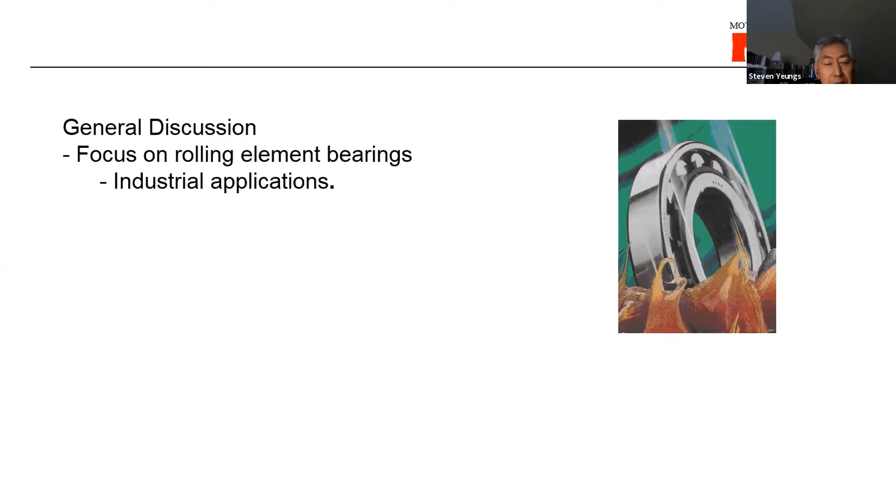So today I will be talking about, it's a general discussion on bearings, the bearing types, the ones with rolling elements, whether it's a ball or rollers, for industrial applications, that's where I belong. The discussion will focus on a few things.

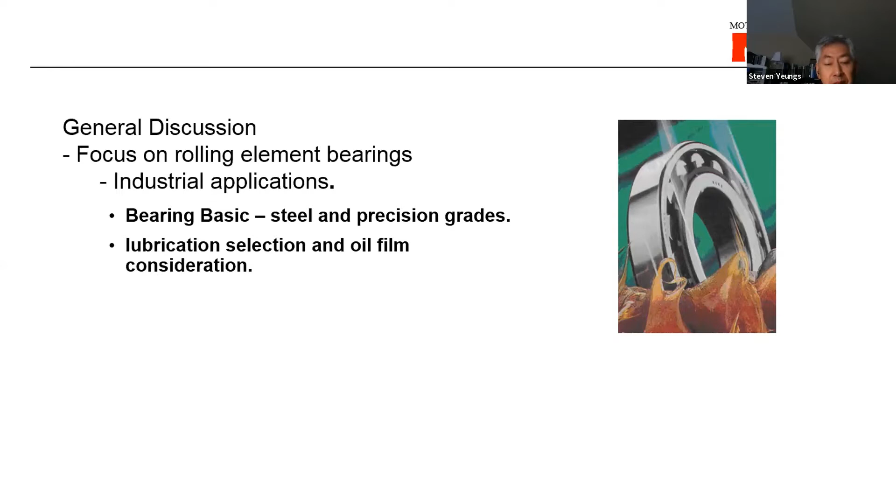One is I want to talk about some of the bearing basics, particularly steel material and precision grades, because for some special applications we have to basically switch steel material or even precision grades to cope with the demand. A bigger focus of today's discussion is on lubrication selection from the bearings perspective, and one of the key primary concerns is the oil film, I'll be talking about that. At the end, I'd like to go through a few cases where oil film consideration might not be enough, and it really poses some challenges, and you have to think outside of the oil film and into other factors.

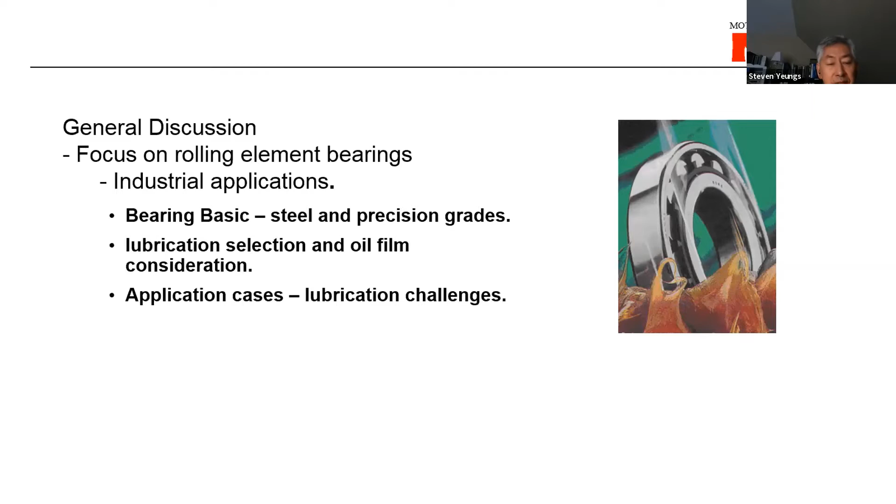So let's start from the beginning.

Rolling element bearings are manufactured in different types and sizes, as small as a pencil tip a few millimeters in diameter, or as big as those used in a steel mill, ship loader, or mining application. They can be as big as 15 feet in diameter, for example, a slewing ring.

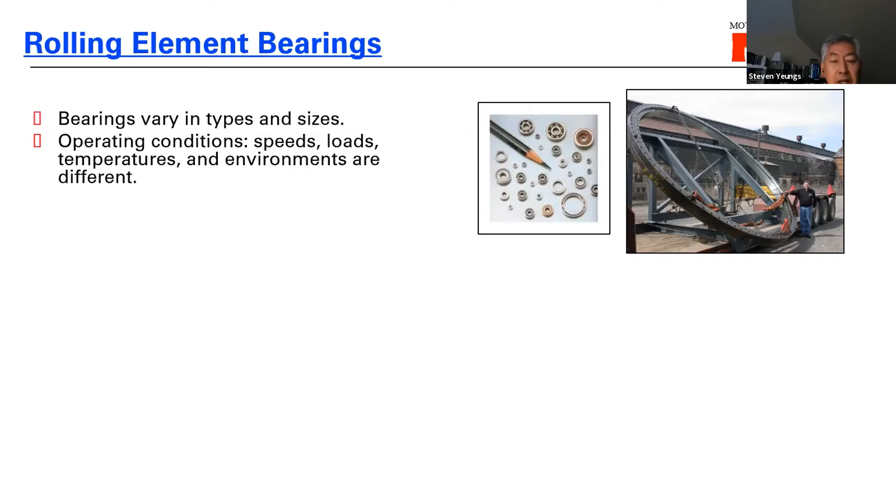Their operating conditions, as you can imagine, the speeds, the loads, temperatures, environments, are all different. For example, an axle box bearing used in a high-speed train running over 300 kilometers per hour, where reliability is extremely important, has drastically different conditions than a dental drill that you visit your dentist for once in a while.

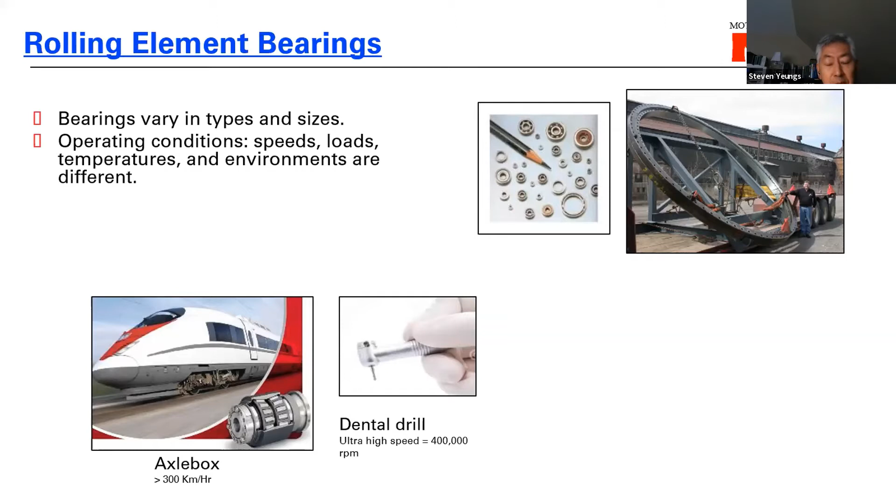Today's dental drill bearings, there are two of them in there. They are very special, running as high as 400,000 RPM, made in a way that produces little to no vibration. They are self-lubricated, so once the bearing has been installed, you don't touch it for a definite length of time.

Now consider a bearing used in steel mills. As you can see, the environment has heavy load, shock load, slower running speed, but also moisture and contaminants that can pass through the seals into the bearing.

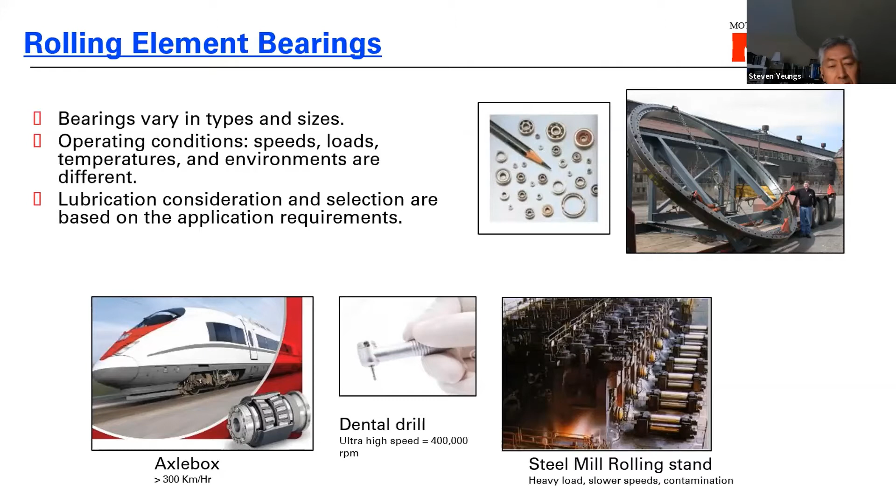So these conditions suggest that lubrication selection should really be based on the application itself. Often people ask, what's the best grease for the bearing? That's not really a valid question, because lubrication should be selected based on what the bearing is being used for in that particular application.

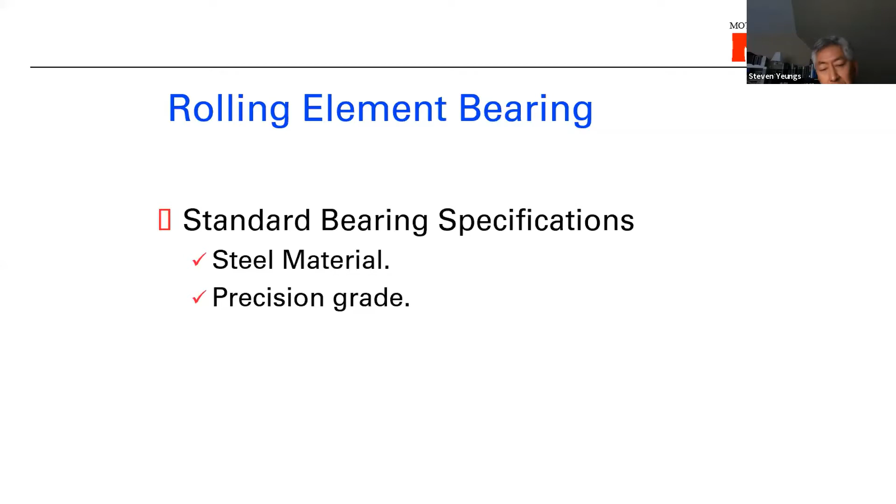A little bit of information on bearing basics. Bearings are made to certain standard specifications. I'm going to talk about steel material and precision grade before we talk about lubrication again. In terms of bearing steel, what are the characteristics?

Bearing steel has to be made very pure and low in impurities or dirt components to ensure it has good fatigue strength. The bearing steel should have very high hardness - today's hardness values are about 58 to 62 Rockwell C as the standard range for most bearings. It should also have high wear resistance and high dimensional stability.

Normal bearings could operate up to 120 degrees Celsius, but some bearings are made to withstand up to 200 degrees Celsius, and they require high mechanical strength.

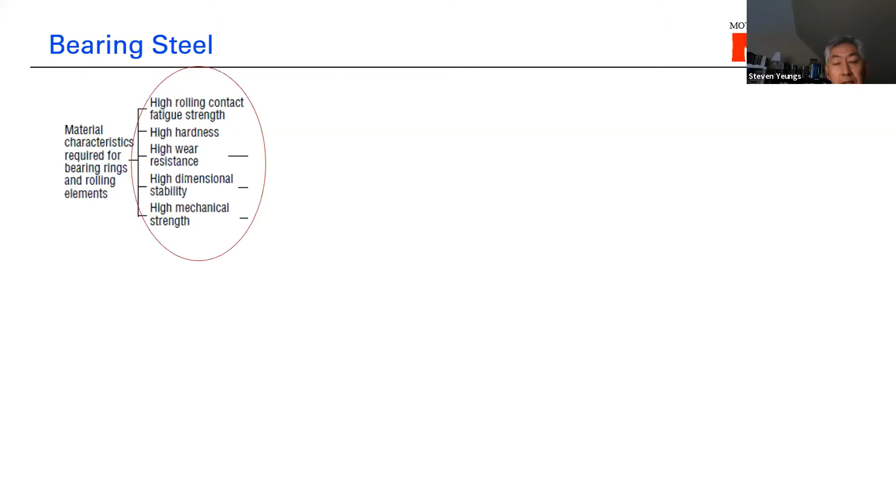There are common steels out there, and the most common is through-hardened steel, which people might hear about from time to time. Through-hardened steel means that through the cross section, the hardness remains the same throughout. The recipe is known as 52100, which is the ASTM spec.

NSK uses the Japan Industrial Standard, so the equivalent is SUJ2 or SUJ3. The characteristic is that this bearing steel is basically a high carbon chromium steel - you can see about 1% carbon, with chrome and additional alloys.

The other type is case carburized steel, which is the opposite of through-hardened steel. The carbon content is low, about 0.2%, with chromium and different alloys added as well. There are many others out there.

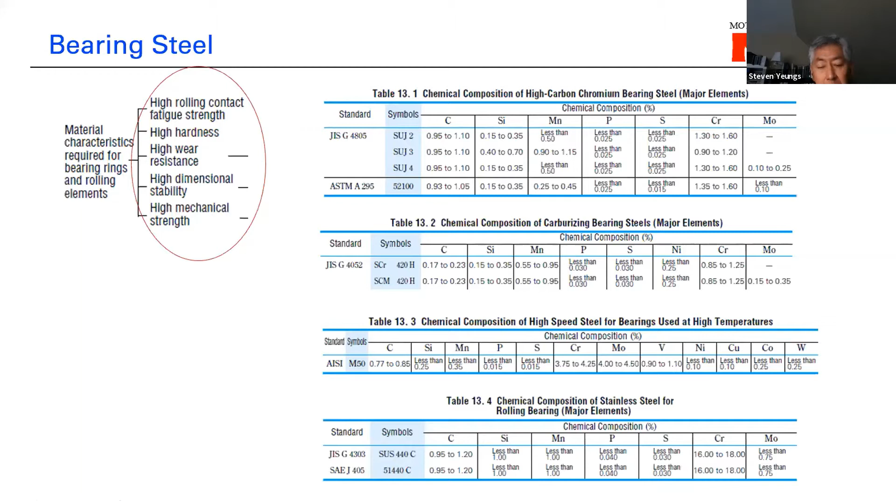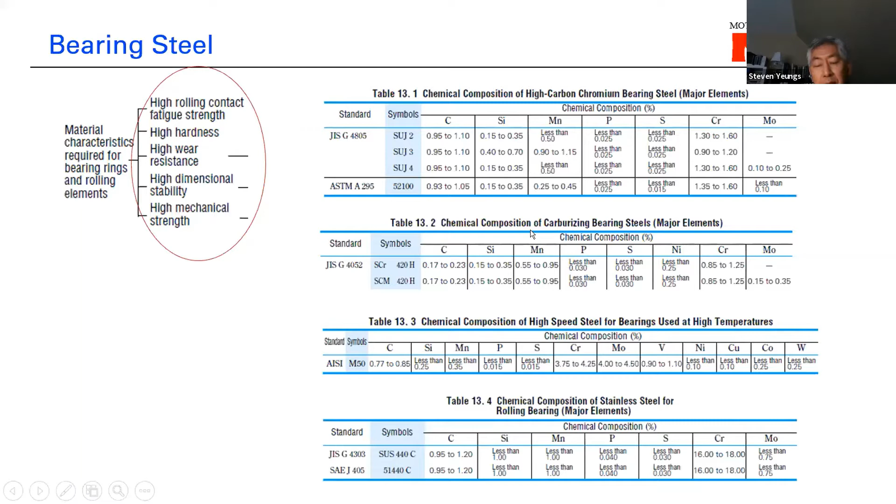For aircraft applications, we use M50 - as you can see, the recipe changes again, they're different. Stainless steel is often used in the food industry, medical industry, and for small size bearings. Stainless steel has about 1% carbon and very high chromium content. All these are produced, and there are many others for bearings used in different applications.

But one thing for sure, bearings still have to be clean - they are very pure. Over the last 40 years, manufacturing of bearing steel has been refined so much that the oxygen content has been kept so low.

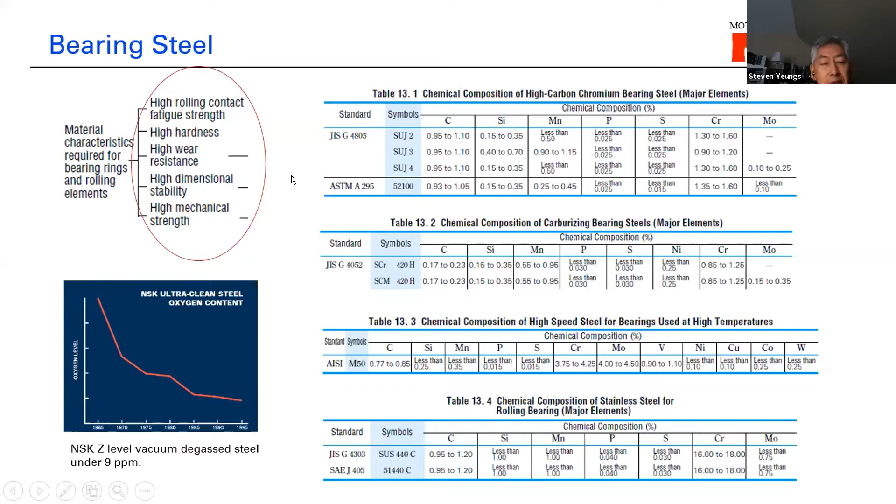Nowadays, as of the year 2000, NSK, as far as steel goes, maintains what they call the Z level - they can keep the oxygen content way under the 9 ppm mark. In any case, for some of the key major manufacturers of bearings, trying to keep the steel as clean as possible is one of the major goals, in order for the bearing to have good fatigue strength.

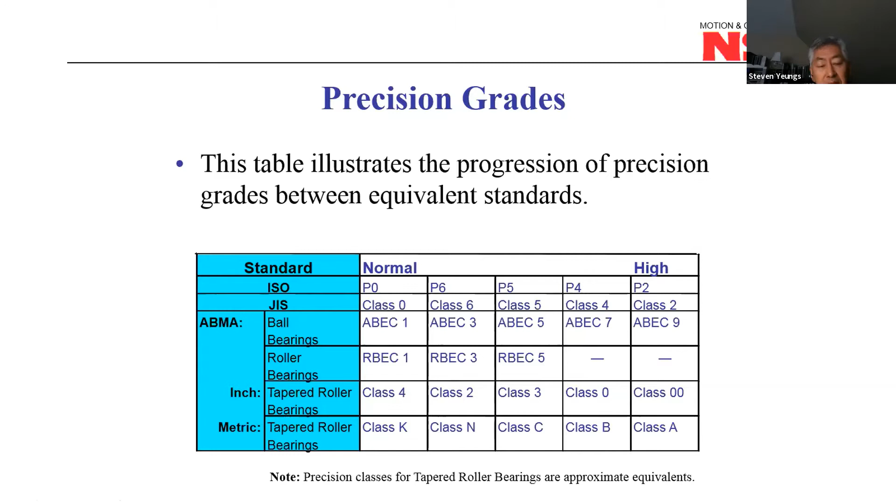Most bearings are made under normal precision, P0 or ABEC-1. That's for the standard bearings you deal with on a daily basis. When conditions get more demanding, toward much higher speed or higher accuracy, we have to go for something toward the right hand side, whether it's ABEC-7 or P4 spec, the equivalent.

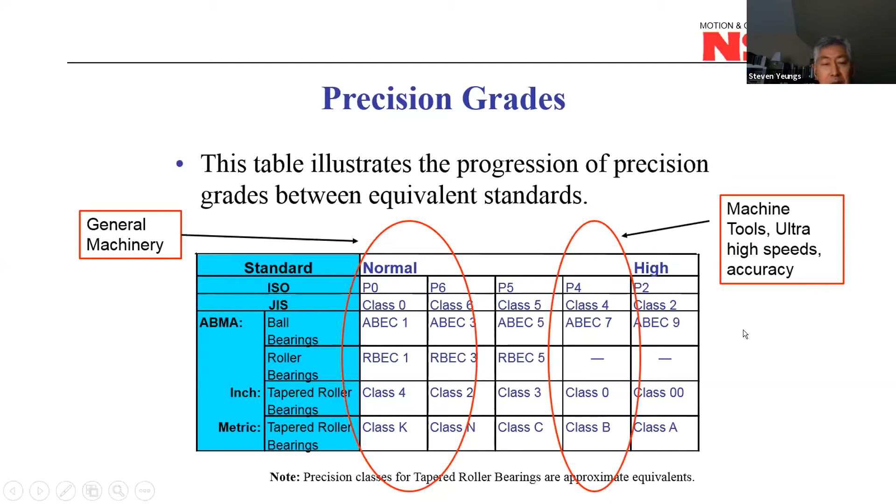We have to go for something with even tighter tolerance or better runout in order to achieve the objectives. So, just a little summary: not all bearings are made equal. Bearings have to be made differently in order to cope with the conditions I mentioned earlier. Even back to the first slide, the bearing I use in a dental drill is not an everyday bearing.

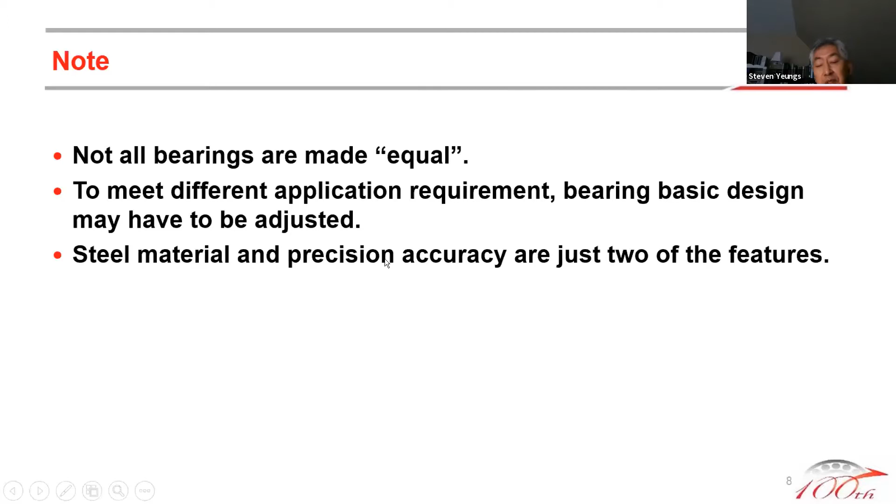They are totally different from what you deal with every day. The whole bearing has been gutted, from the material to the cage to the ball material and the lubricant itself. So to meet different application requirements, sometimes the bearing design has to be adjusted. As I said, steel material and precision accuracy are just two of the features I mentioned, and there are others which I'm not going to get into today because of time constraints.

What about lubrication for all these different types of bearings? How do we look at them and how do we select them?

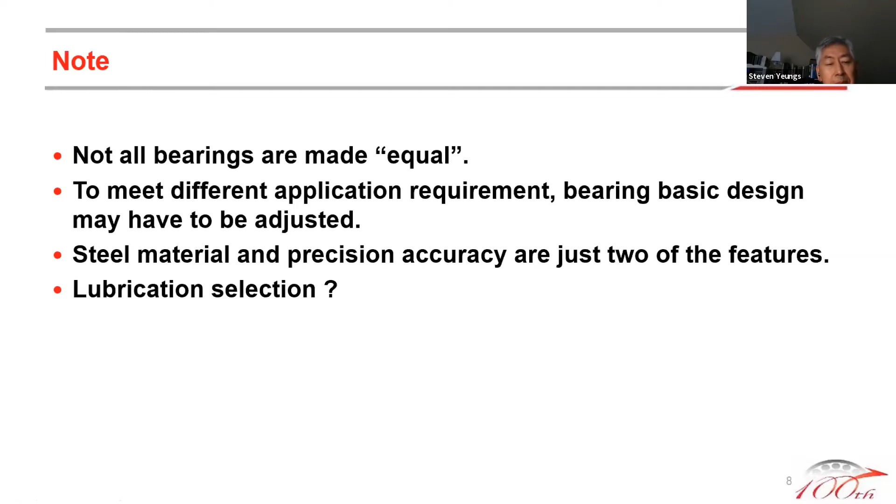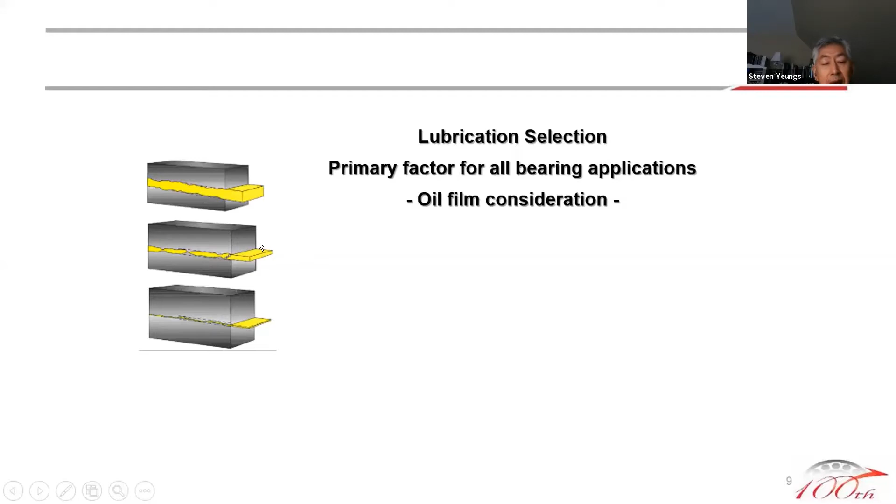For all bearing applications, when we look at lubrication selection, our primary concern is the oil film. As you can see, if the oil film is not there, you're going to have metal wear. So we want to establish an oil film so that metal wear can be eliminated or prevented. That's really the objective of lubrication: to form a film between the bearing components that move relative to one another so that metal contact can be eliminated.

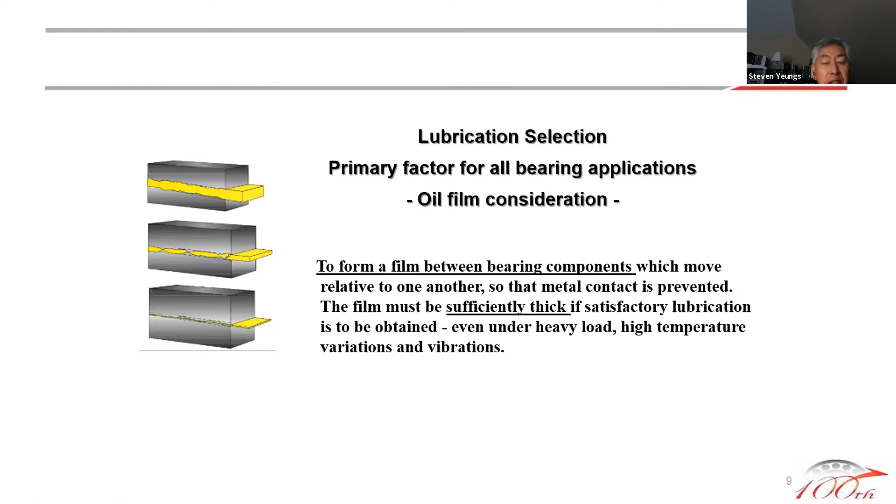The film has to be thick enough, but you don't want it too thick, which I'll explain later on. It has to maintain its thickness under different conditions: heavy load, shock load, high temperature. So it has to be selected in such a way that we can form a film adequately.

When we look at the contact area closer in a bearing, theoretically we use the term oil film parameter, which is a function of the oil film thickness versus the average roughness of the surfaces. We want the oil film parameter to be greater than 1 in order to have that separation. Typically, how thick is that oil film? We normally use the figure of 1 micron under operating conditions. As you can imagine, the surface roughness is about 0.1 to 0.2 micron.

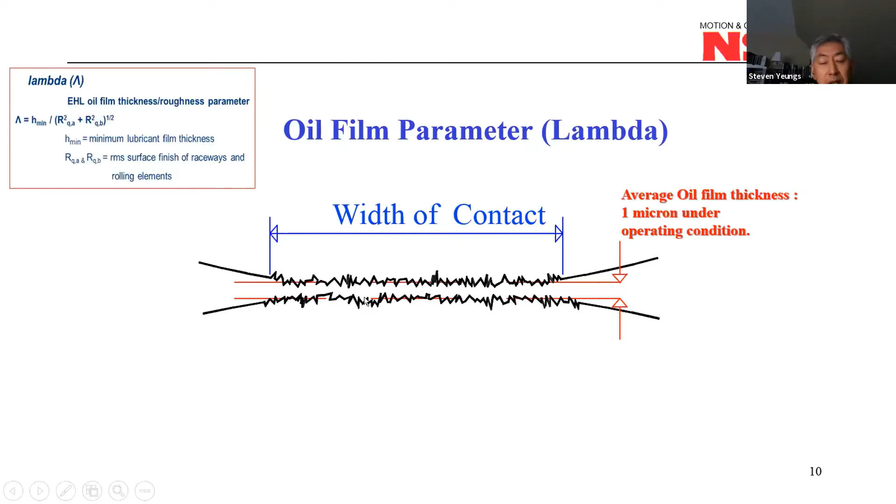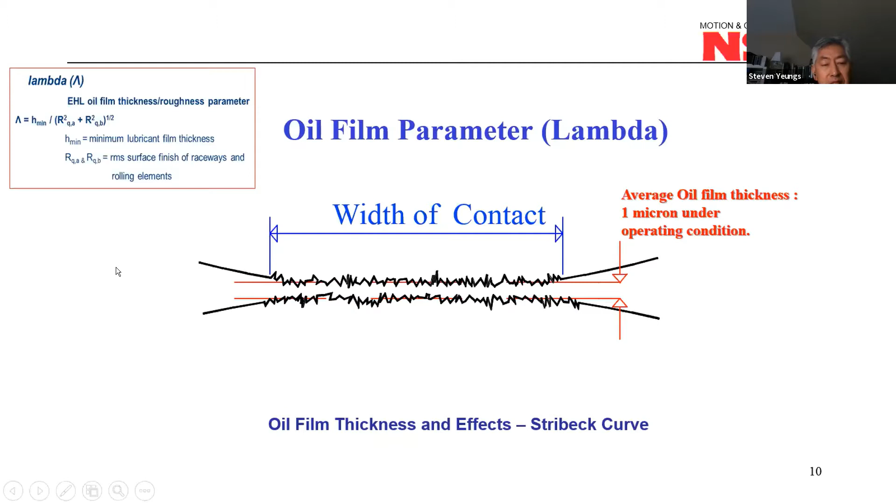To further understand the effect of the oil film, we can look at the Stribeck curve. I would imagine most people have seen it and understand it. On the left-hand side we have the friction coefficient, which is the y-axis. On the x-axis, it's a function of the oil viscosity, velocity, and load. As you can see, both the oil viscosity and the velocity, the speed of the bearing, have a great impact on whether the oil film can be generated effectively.

When you look at the graph, there are three conditions. Boundary lubrication is on the left-hand side, where the friction is very high. That's the situation when the oil film basically doesn't exist or is very thin, and it cannot protect the bearing surfaces. Reasons for that are either the oil selection was not adequate, or the velocity isn't there. For applications that run at less than about 5 RPM, naturally you are in boundary lubrication conditions, and there's not much you can do except expect bearing wear to start from the get-go.

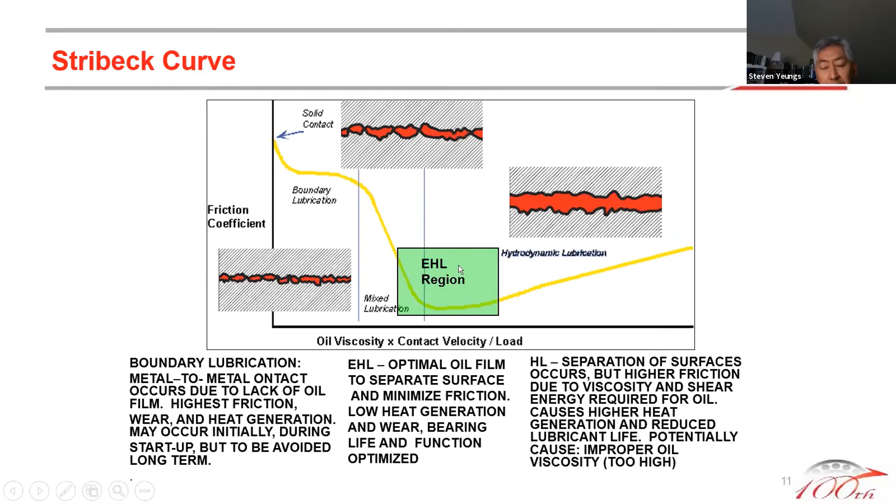The faster it runs, the more friction is generated, so the temperature naturally increases. For bearings, that's not really desirable in some applications. So the green area is what we try to aim at, optimizing the oil film and making sure it's adequate for the bearing application under different conditions. So how do we calculate that oil film, and how do we know it's good in a certain application?

I'll use this watercraft, which I dealt with some years ago. Underneath the watercraft there's a pump, and there are two bearings that are very special, somewhat custom made for that application. It's a double row ball bearing with a bore size of 45 ID and 61 OD. The speed is 7,800 RPM.

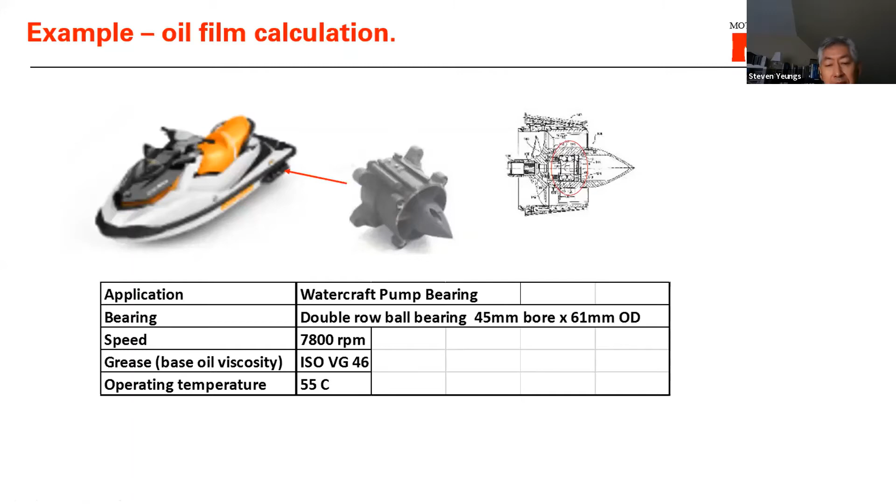If you understand what I said earlier, the speed is a big factor. So right from the get-go, I know 7,800 RPM means the oil film is going to be created, but I'm afraid maybe the oil film is too thick — that's one thing I needed to check. They're using a 46 weight grease with a base oil about 46 centistokes. The recorded bearing temperature was 55 degrees Celsius, which is not a bad temperature at all for bearings. Anything under 70 degrees is considered a good number for bearings used in general industry.

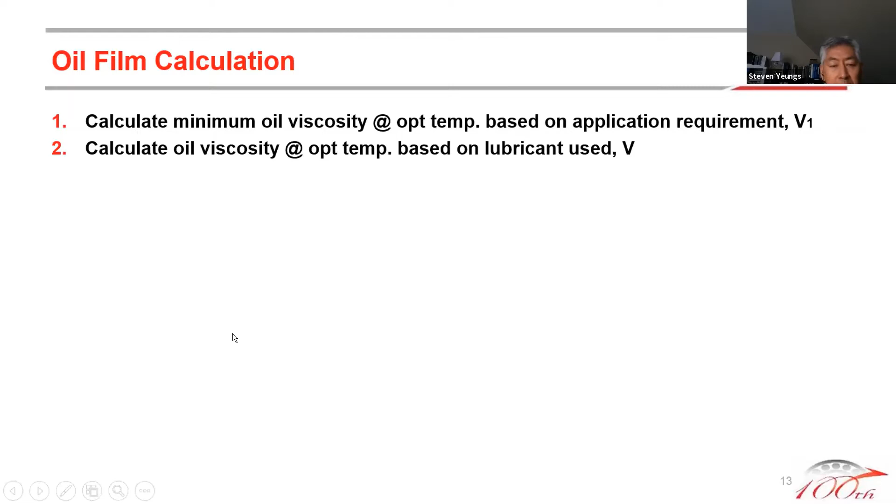So how do we check it? Very simple. My first step is to calculate the minimum oil viscosity at the operating temperature based on the application requirements — namely the speed and the bearing size. Secondly, I calculate the oil viscosity at operating temperature based on the lubricant used. Normally we just input it into our in-house program and it spits out the results, but here we're going to do it by hand.

Here's a diagram we can use to calculate the minimum required viscosity based on the application requirements. On the bottom we have the size of the bearing — in this case the mean diameter is 53. The slanted lines represent the speed of the bearing. So we draw a line vertically up and hit 7,800, then go across horizontally. It tells me that for this application, at 7,800 RPM, I need a minimum of 7 centistokes at the operating temperature.

In this case, the operating temperature is 55 degrees Celsius. So I used another graph, looking at 55 degrees centigrade and 7 centistokes. You can see I actually need something really thin to be satisfied with the oil film conditions. But let's look at what they're using — a 46 weight — and based on that, at 55, it's about 25 centistokes. So when I do the calculation for the viscosity ratio, I get about 25 over 7, which is 3.5.

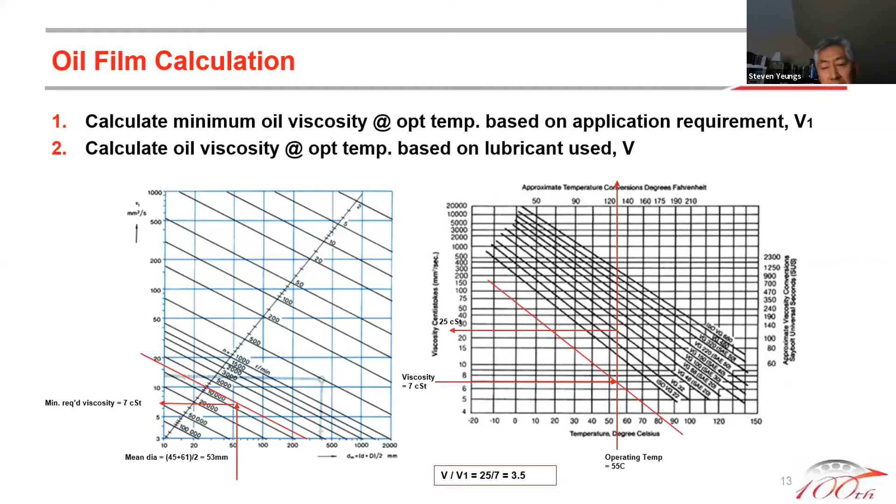As I mentioned earlier, under the oil film parameters, in that little green box, I'm looking for somewhere between 1 to 4 to optimize my selection. So in this case, 3.5 is very good because the lubricant is not an overkill as far as viscosity is concerned. That's why the temperature was able to maintain at 55. So from that perspective, the selection was quite adequate from the oil film standpoint.

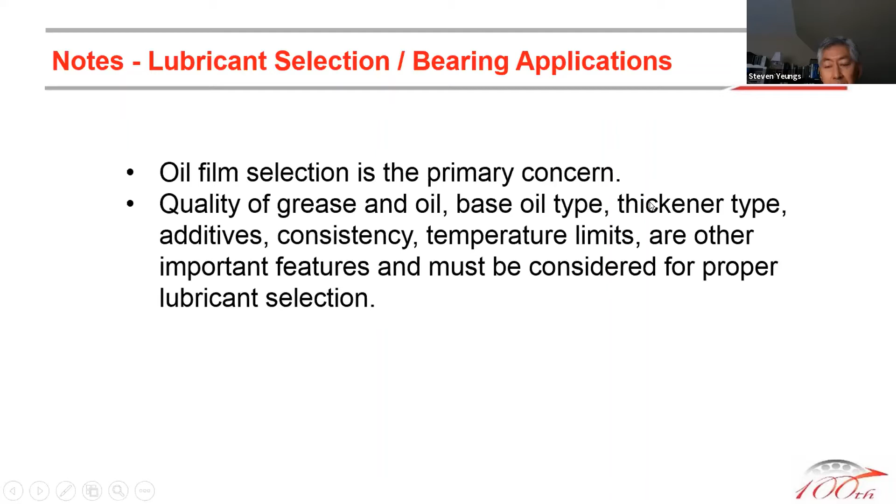Oil film selection is our primary concern, but it is not the only concern. When selecting a lubricant, the quality of grease and oil — depending on the type of base oil, the thickener type since it has so many functions, the use of additives depending on the application, consistency, and temperature limits — are all important factors that must be considered along with the oil film to come up with a proper selection. And obviously, because it's for a bearing, the bearing design parameters such as speed and load ratings also need to be satisfied.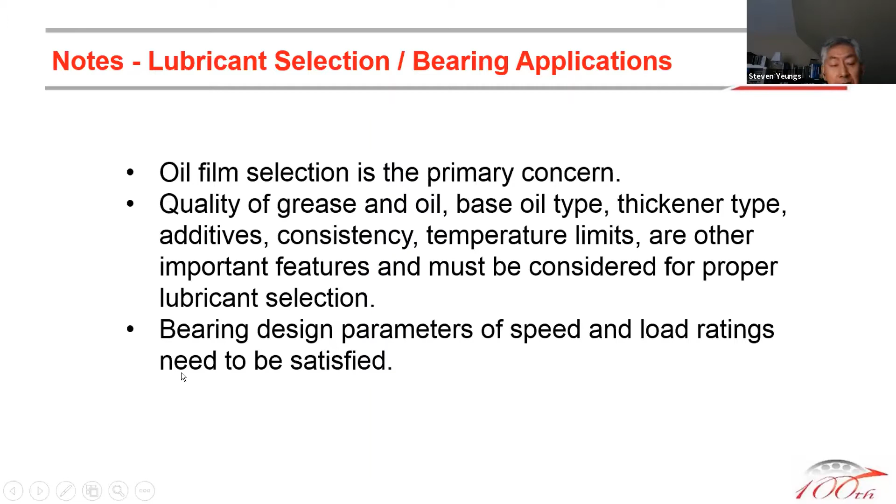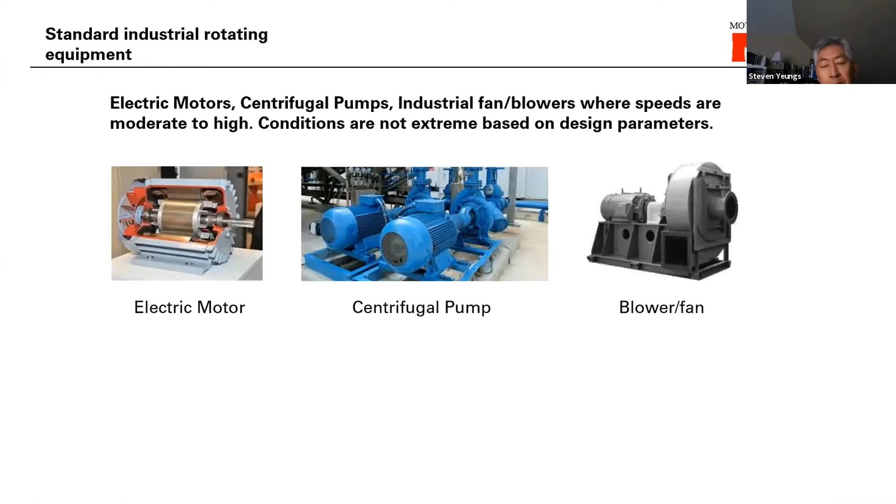I refer to these as standard industrial rotating equipment, such as electric motors, pumps, industrial fans and blowers. There's a lot of equipment similar to this out there. Their speeds are moderate to high, and the conditions are quite predictable. Because there are speeds involved, the oil film often is not really a big concern.

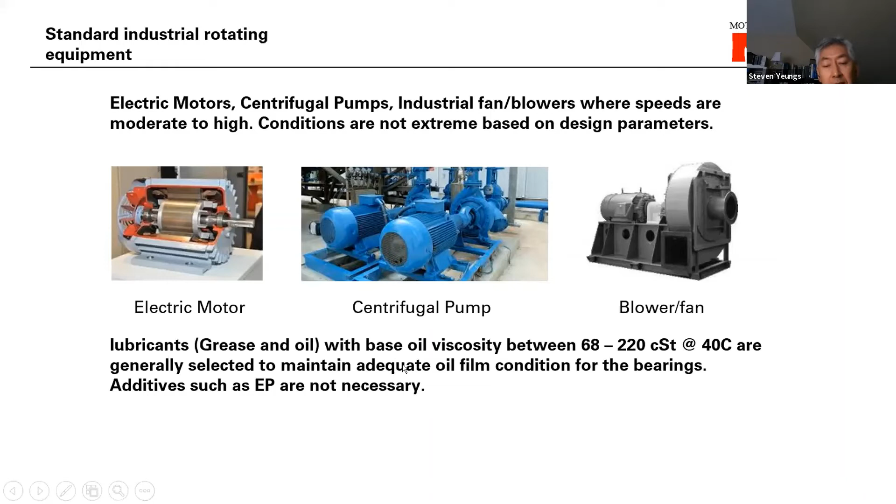And for these equipment, normally if I have to select a grease or oil for it, a base oil viscosity between 68 to 220 at 40 degrees C is generally good enough to establish that oil film for the bearings. Because of that, additives like anti-wear and EP are not really needed, since the oil film is there to separate the rolling surfaces.

All right. But having said that, there are certain applications out there that provide additional challenges, and in those situations we need to consider some additional factors other than oil film. In fact, sometimes oil film itself won't do anything because the situation is so different than the norm. So I'm just going to go through a few applications to illustrate that.

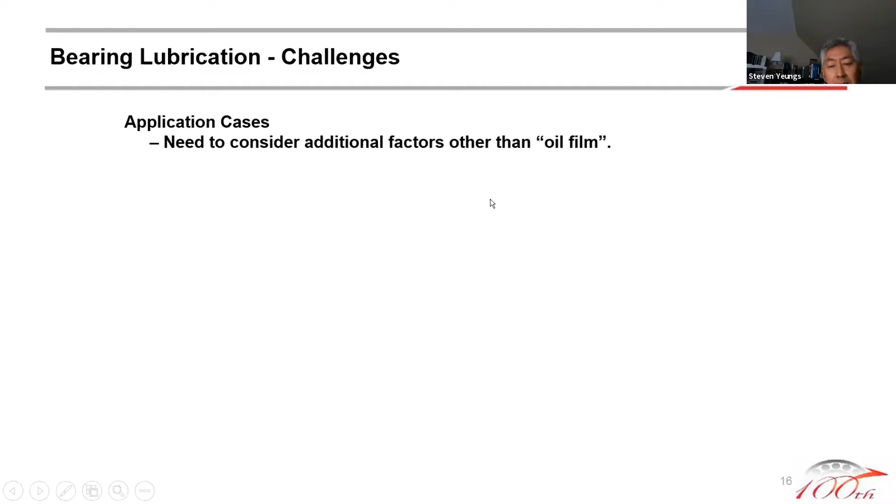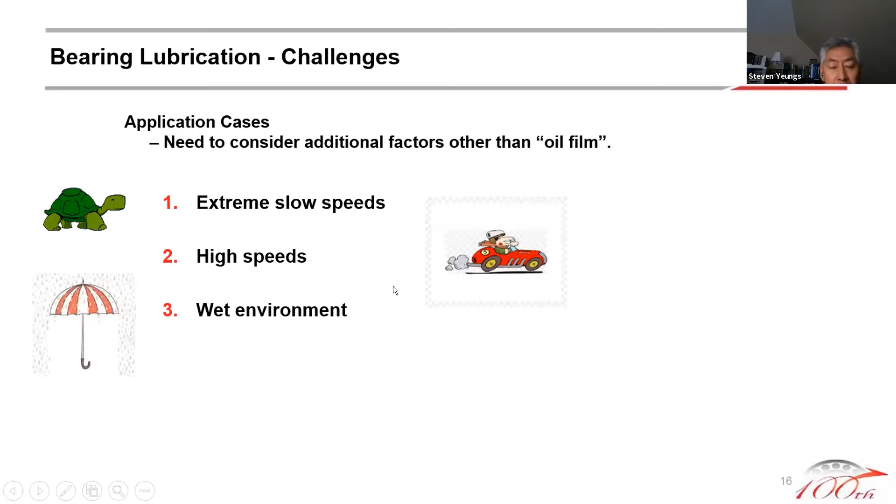Again, not all bearings are made equally and not all applications are the same. There are cases where the speed is extremely slow, cases where the speed is, I'd refer to as too high, bearings sometimes used in very wet conditions, and the last one is cases that involve very extreme corrosion and contamination. Under these situations, sometimes we can look at the oil film, but sometimes there's more to it.

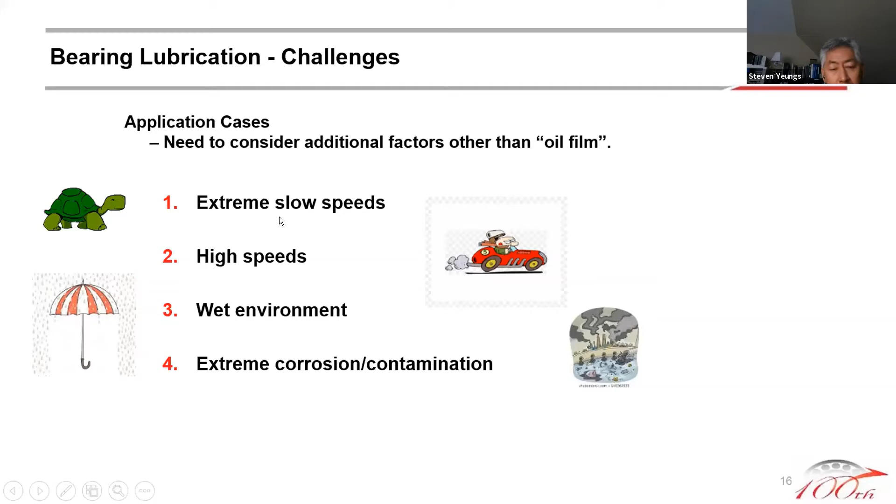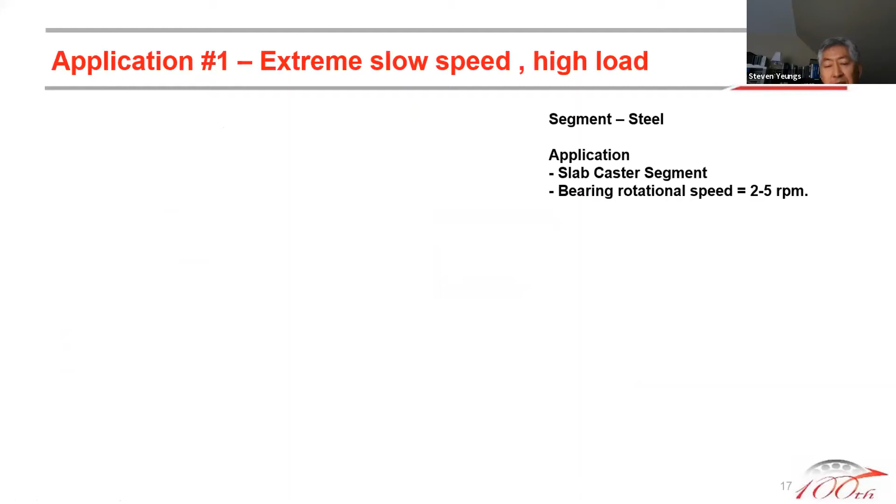So let's look at the first case. I worked many years in the steel industry in that area, and one very typical application is the slab caster, where they produce steel slab. Bearing rotational speed is 2 to 5 RPM, that's very typical. The problem is extreme slow speed and heavy load. The mill likes to use just a grease with low viscosity due to cost and pumpability. The main purpose of using the lubricant is to flush out contaminants and moisture.

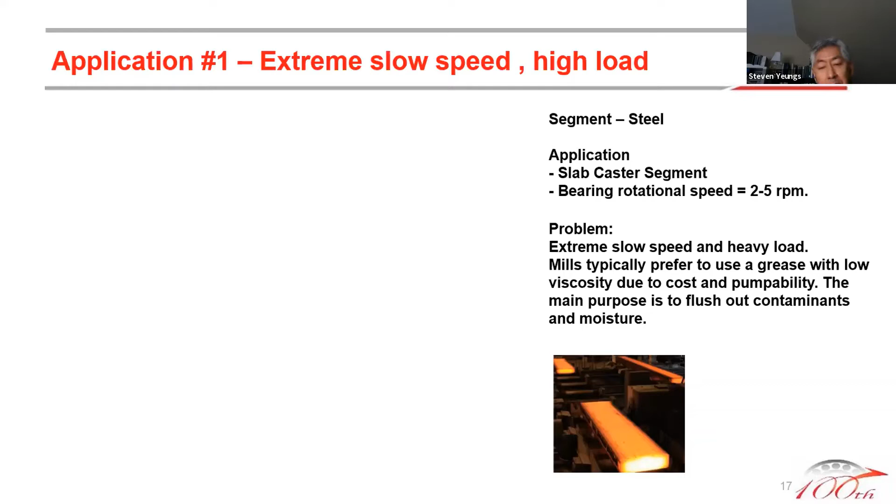So because of that situation, what can you really do? When you look at how bearings are being used as a result of the condition, typically a heavy duty roller bearing, double row bearings are being used. You can see heavy load and extreme slow speed are the two primary concerns for the bearing. And there's going to be intrusion of scale and water entering into the bearing, and also high temperature at times.

So right from the get-go, the bearing was subject to wear. For this type of bearing, the wear will take place over a long period of time, and then flaking will gradually develop. If the bearing can be removed or replaced prior, that is perfectly fine, because it doesn't shut down production. But if flaking could further develop into fracture, and once the bearings start to break apart, then obviously the roll will not be able to rotate anymore. That's the problem people try to avoid.

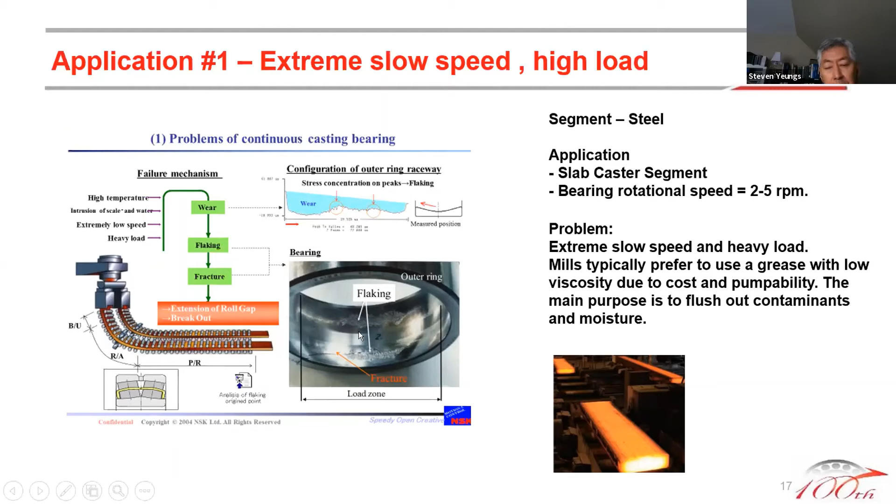But with such a low speed, if you try to look at the oil film, it's similar to what I was doing earlier, looking at the bearing size and then looking at the speed of that bearing. If you factor in operating temperature, you're looking for a lubricant grease close to 2000 centistokes. And when you factor in the operating temperature at 85, you're looking for something that may not be commercially available. You're not going to look for something super heavy, because it becomes not practical to use in this application.

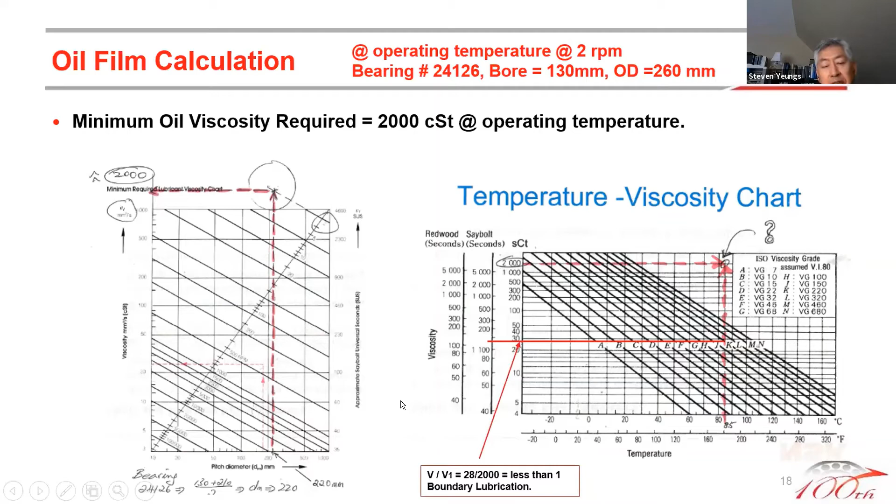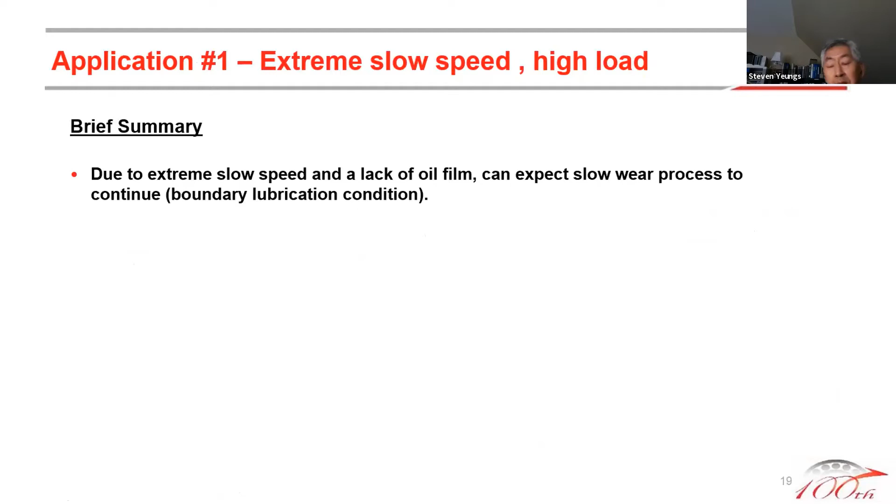So this is what I said about oil film. Sometimes even if you want to provide adequate oil film conditions, there are cases where you just cannot, mainly because the speed is such a low speed. So when you do that viscosity ratio, you basically get less than 1, so you're in a boundary lubrication condition right from the get-go. As a summary, due to extreme slow speed and a lack of oil film, one can expect the wear process to continue right from the get-go.

To prolong bearing service life in this particular application, I would consider these factors. I would try to eliminate contamination, scale, and water on a constant basis. Supply and maintain a constant supply of lubricant to the bearing, even if it's less ideal. Try to use a lubricant with lower viscosity, which most mills would do, but sometimes they just use a straight low viscosity grease and don't consider the anti-wear additives. I think that's where anti-wear or EP additives would become beneficial.

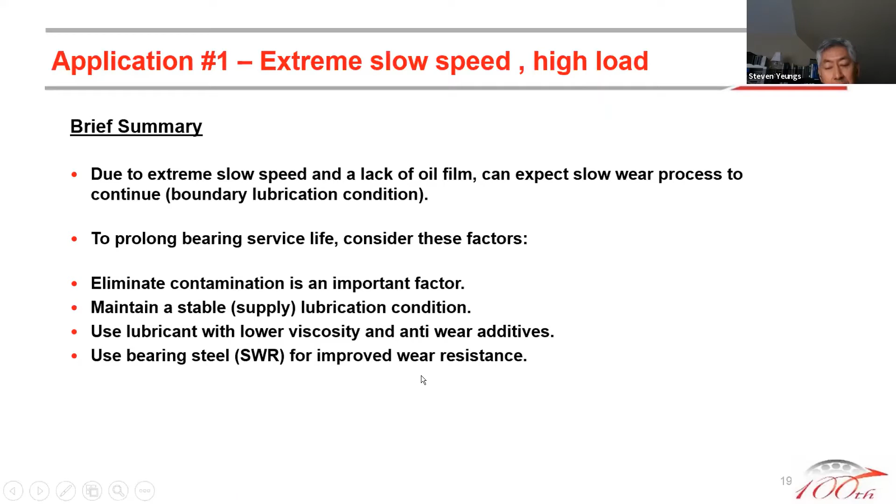And the other option is to use bearings with special material to improve the wear conditions in the bearing and prolong the bearing life. But I wouldn't really consider using special bearing steel unless the first two conditions are satisfied. Once you have a stable condition, then you can see the gain in terms of using better steel material. So that's my case number one. The case for number two is the speed is too high.

Typically, in my past few years, there's been a few applications where bearings actually are needed to run above what we refer to as the speed rating. In this particular application, it's a vertical arbor gang saw, almost like a spindle with two bearings.

A 6228 is a ball bearing, and the operating speed is 3,400 RPM. But when you look at the older catalog, the speed rating for grease is only 2,200, and for oil it's only 2,800. How can that be possible? The future speed, as we know, is not only 3,400, they're pushing towards 3,800 RPM. So what can we do about this?

In order to cope with the higher running speeds, in this particular case, we eliminate grease. We're using oil-air lubrication. The selection originally was 68, but as speed increases, we know generating that oil film is not a problem — generating too thick an oil film could be a concern. So that can go to a 46 weight, or 32 towards the future.

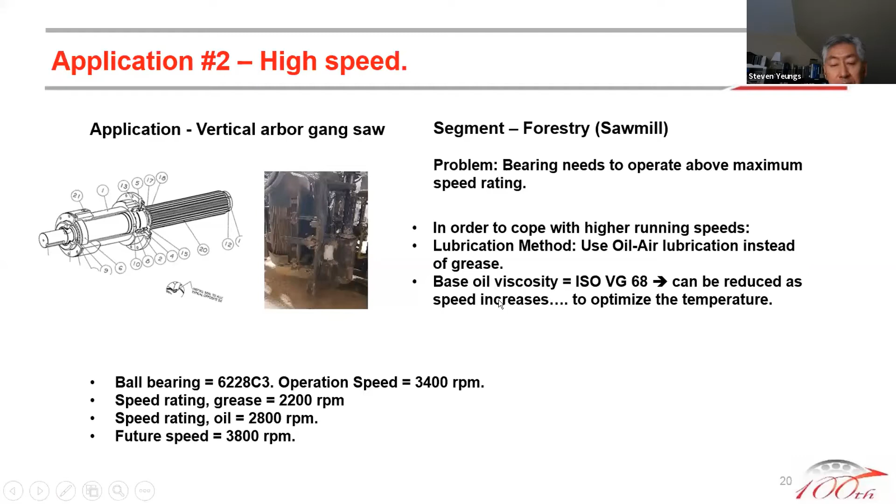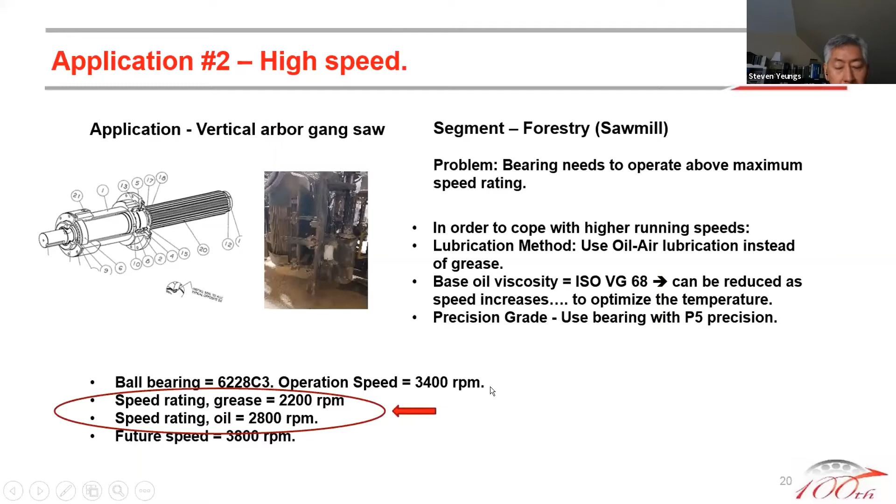And with the bearing at a higher precision grade, we can push for another 10% increase in speed capability. So for some high speed applications, we're not just looking at the oil film or the lubricant, we then have to look at the methods for lubricating the bearing to cope with the conditions. In this particular case, not just the method, but also the bearing precision grade have to be put in context. So in the future, when they go to 3,800 RPM, we can still maintain the bearing performance. At this point, I just want to point out the speed rating in the bearing catalog.

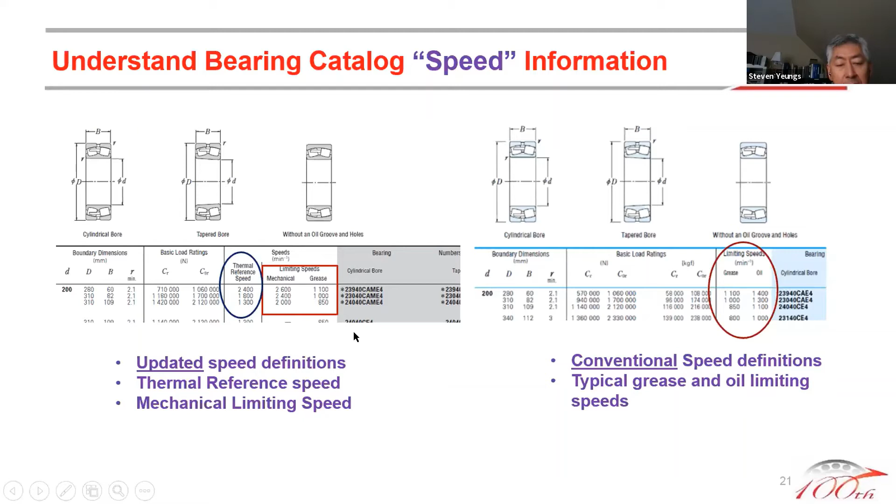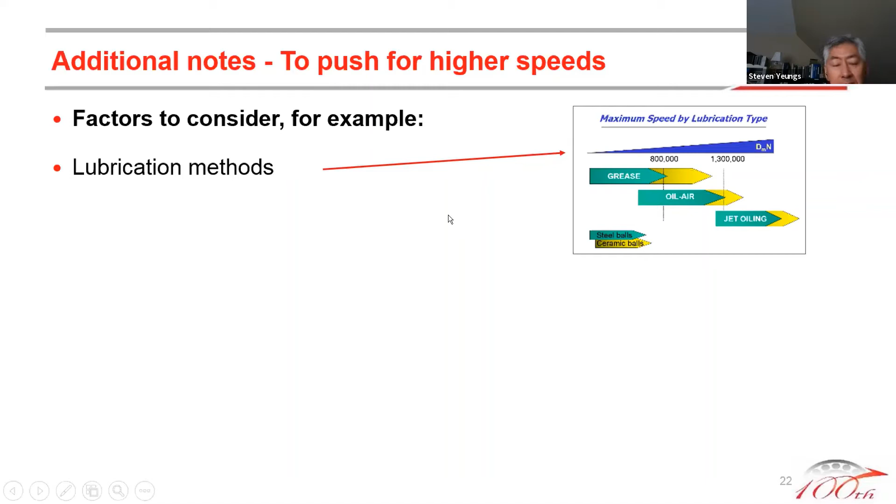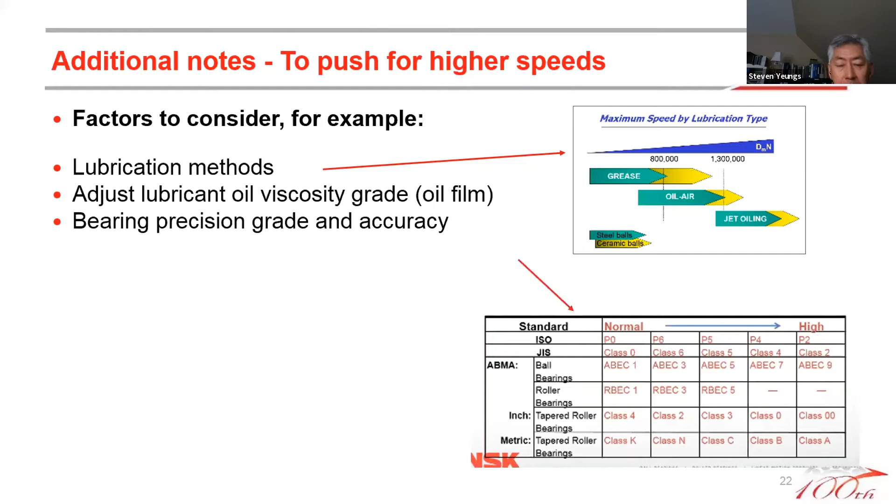So just additional notes — if you want to push a bearing to run at higher speeds, as I said, you can look at the oil film for the lubricant, but there are additional factors to consider. The lubrication method, because grease is the slowest, and oil bath, air-oil, oil-air system, oil mist system certainly provide some advantage in that area. The oil viscosity, as speed goes higher, may need to get adjusted. Bearing precision helps push for higher speed, and sometimes the material needs to be changed as well.

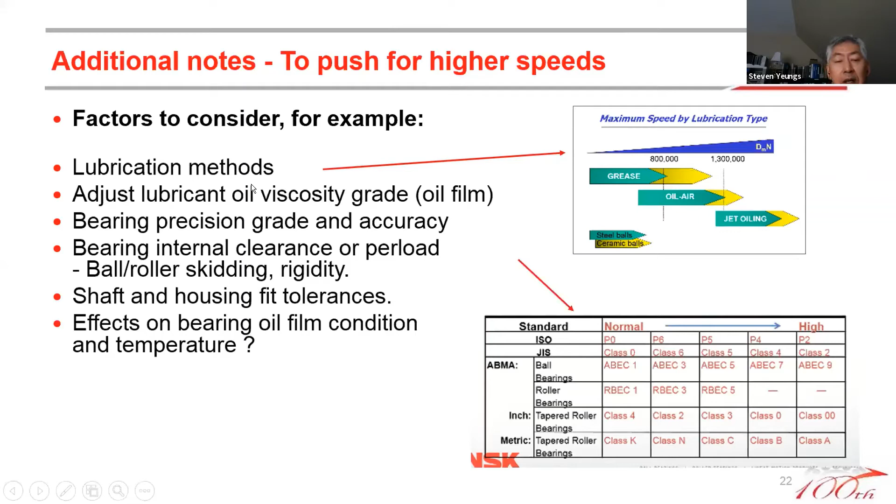I haven't talked about bearing internal clearance or preload, which helps control possible ball-roller skidding or rigidity issues. But again, this is something to consider, along with the shaft and housing fit tolerances. All these factors have an effect on bearing oil film conditions and temperature. So it is not a simple task when somebody just wants to push for higher speeds.

And the third case that I thought was interesting over the years was wet conditions. The segment is food and beverage.

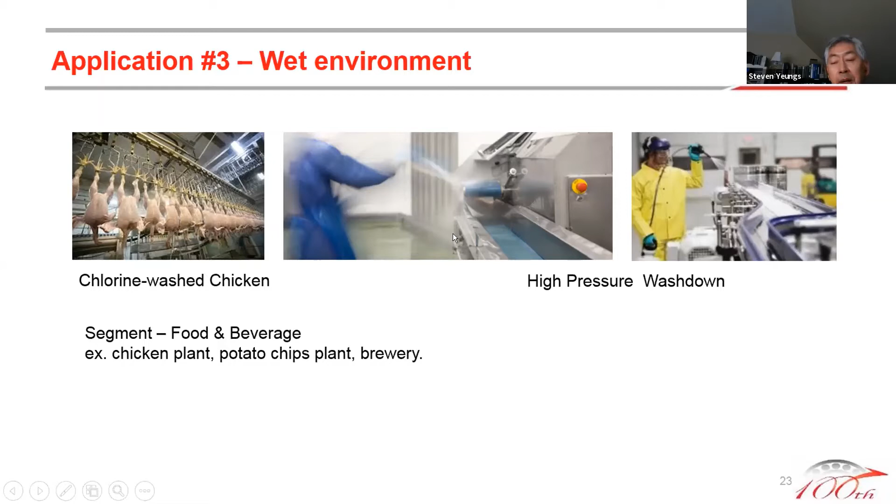If you walk into a chicken plant, potato chip plant, or brewery, on a daily basis regular wash down with high power, high pressure washers take place every 3 hours or so. With that, grease sometimes gets washed out, causing corrosion to the bearing, and sometimes contaminants actually get inside. Based on that scenario, it doesn't matter what lubricant you pick, if it doesn't stay in there, it's not good.

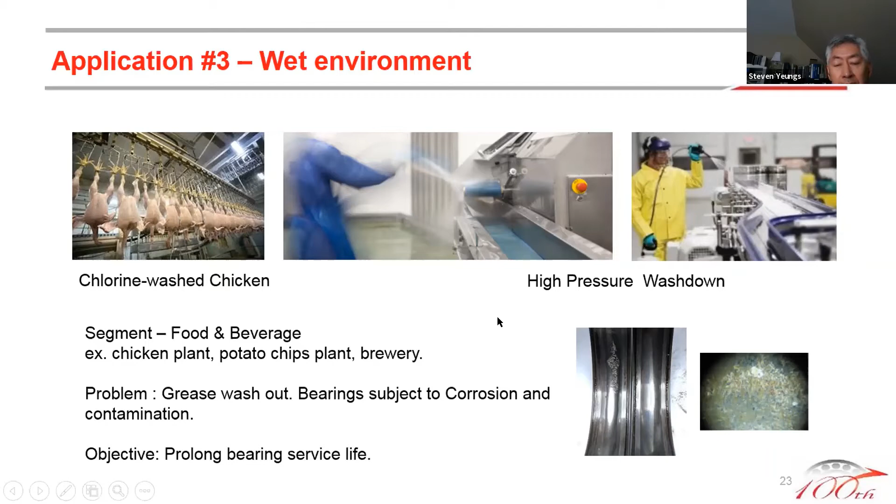So the idea is, what do you do in those cases to prolong bearing life? Sometimes we have to think out of the box and look for unconventional lubricant. This is one of the products being used in the food industry, under the name molded oil, to replace grease, because it stays within the bearing and doesn't get washed out under high pressure.

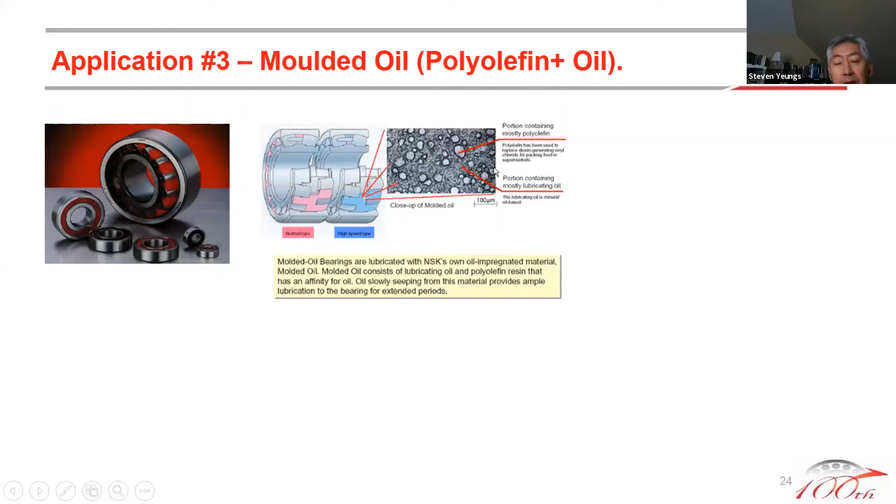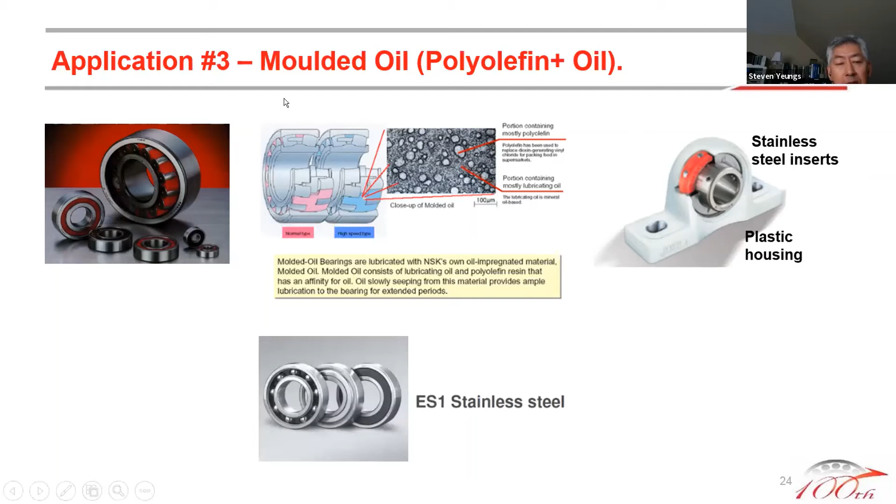Sometimes the bearing used in the food and beverage industry has to be stainless steel as well. In this particular case, it doesn't matter how you select the lubricant, because it doesn't really last and stay in one place. So there isn't much you can do except think of something else that can solve the problem.

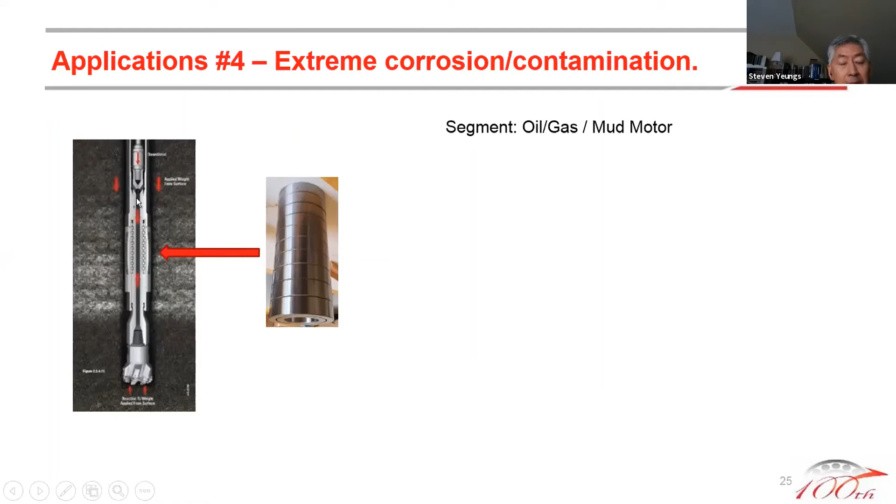The last one I want to quickly go through is extreme corrosion and contamination. Throughout my career, this is probably one of the worst: a mud motor. For those who work in the oil and gas industry, the mud or drilling fluid is pumped through the internal area so it can operate the drill head.

Unfortunately, all this drilling fluid has to pass through what they call the bearing, and we use the so-called stack bearing. There could be 6 or 8 of them. They're designed to take the load in both directions, but they're not lubricated by anything except the mud. The mud could be oil-based or water-based, which is the most corrosive, and also comes with solid particles.

So based on that scenario, the objective is you want something to put in, and unfortunately it can only be lubricated by the drilling fluid. You want something that can last, at least not break down during the drilling. This isn't a new application, it's been around a long time. We want to put something in so that when they do the drilling, they finish the production, whatever runs they want to make, maybe 3 or 4 every time they go down the hole, and when they come back out, hopefully everything is in one piece.

So the main factor in this case is the bearing internal design has to be well designed. Again, we put in special bearing steel material, other than the conventional one, to make sure there's no fracture happening during the drilling procedure.

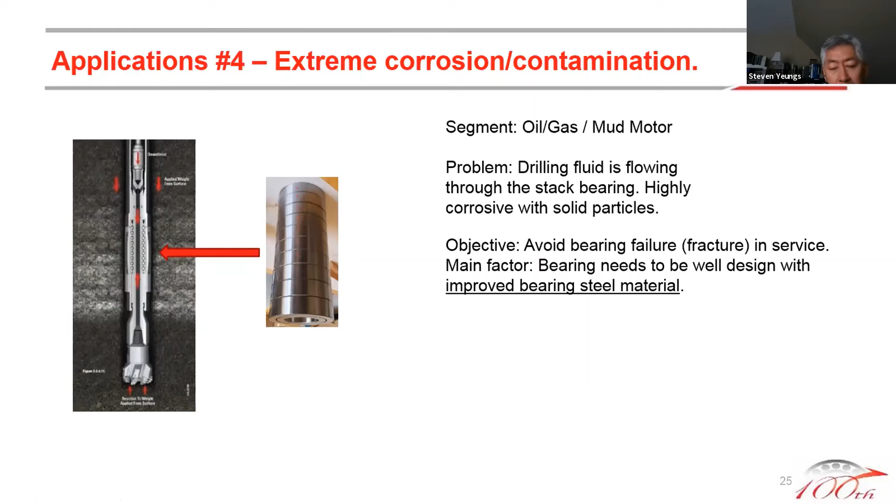So they are happy with the results. In this particular case, they will replace the bearing and put a new set of bearings in for the next production run.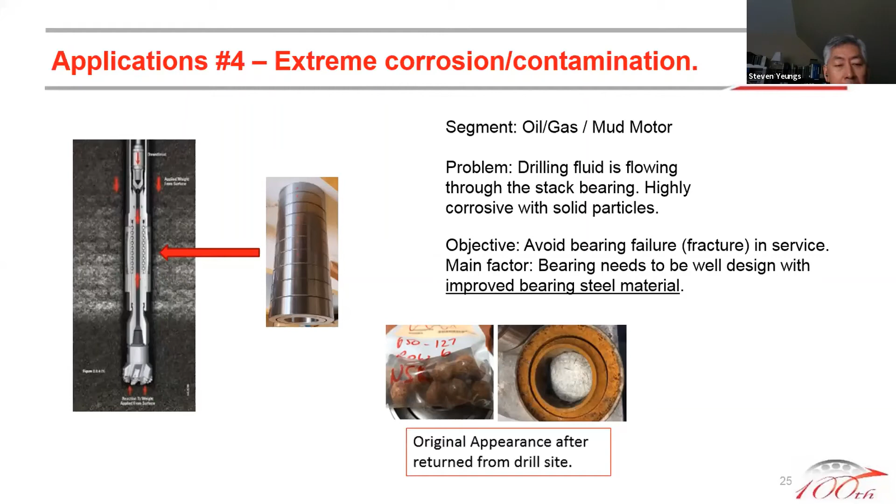So this is my last slide. Just to mention, there are many technology developments within the bearing world, because applications are more demanding. Even today with the EV market in automotive, the motor, for example, no longer running at 1800, is looking for 30,000 RPM. As an example, one of the areas for heavy industry that NSK has focused on over the past 20 years is so-called material technology—bearings with special steel and special heat treatment.

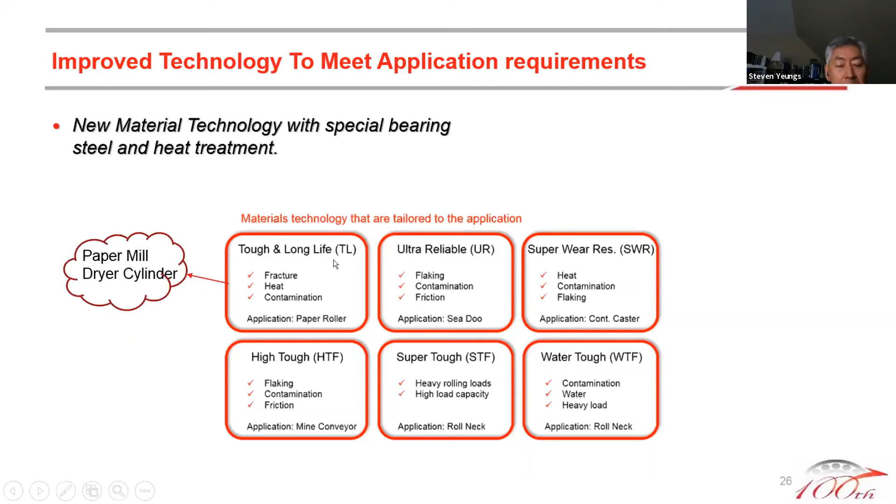I don't want to go too much into the details, except this particular slide shows 6 different formulations. The TL steel is for the paper mill dryer cylinder applications.

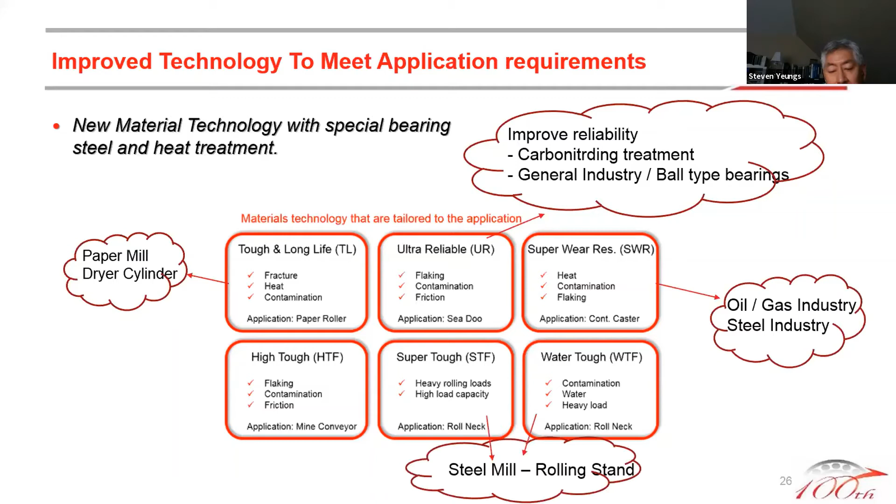The UR treatment is for general industry ball type bearings, for applications and bearings that need higher reliability and longer life. SWR is used in the oil and gas industry, like mud motors, and also the steel industry where speed is very slow. In the caster, for example, it's for higher wear resistance and fracture resistance. The STF and WTF are for steel mills, the roll neck bearings, and the HTF is for the mining industry, such as head pulleys and conveyors. Again, contamination is a problem in slurry pumps.

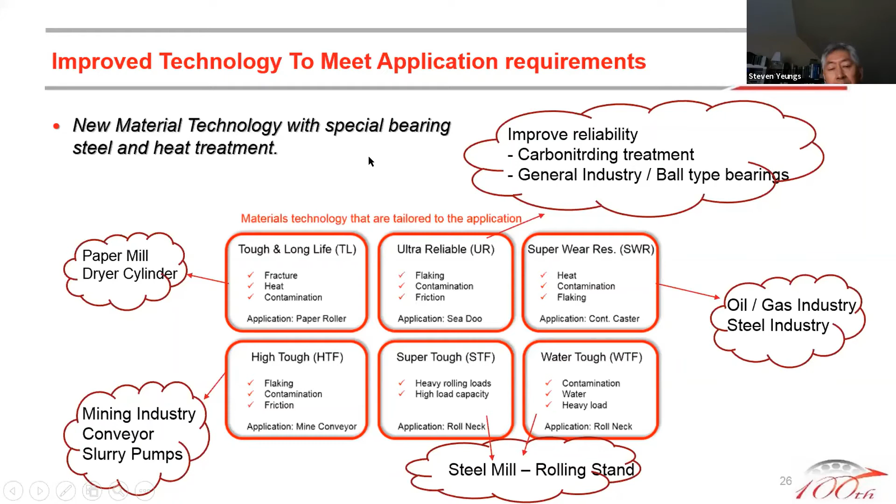So there are many so-called new technologies being employed, just to deal with the increasing demand out in industry. And with that, that's basically my last slide. So I'll just turn it back to the host.

Can you hear me? Yeah, we can hear you, Stephen. Okay, I think Jacqueline looks like she's frozen up here. Give me one second. So we have a couple of questions that came in through your presentation, and thank you, by the way, that was very informative.

There's six questions. The first one: does NSK have a manufacturing plant in Canada? If so, where, and how many plants in North America? There's none in Canada. In fact, I think NSK never had a plant in Canada. In the United States, there are up to three plants - one that makes mainly ball type bearings, another for hub units, and another plant focusing on linear motion products, such as ball screws, under precision products and parts, and I think that's about it. The rest is in the rest of the world, and as you know, for the past 5 years, the majority is still in Japan. But in Asia, for example China, we have I would imagine 6 to 7 plants at this point. The rest is in Europe and UK - NSK bought RHP in the 90s, so if you remember that name in terms of machine tools and bearings, a few factories are still being run over there. So again, it's Poland, Brazil - it's scattered quite a bit.